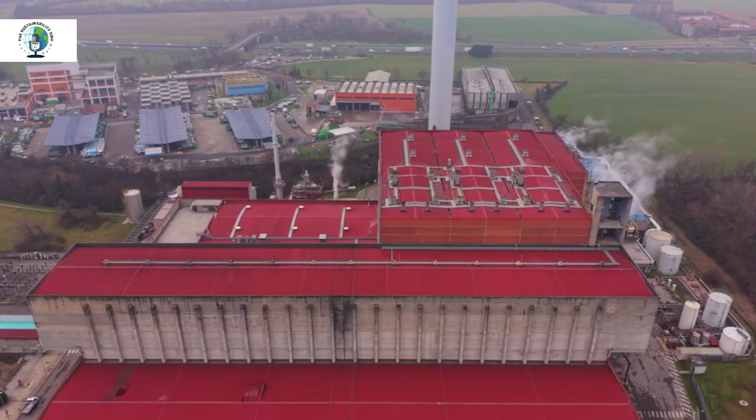Everyday industries generate tons of pollutants, waste that we struggle to manage, hide, or dispose of. But what if that waste isn't waste at all? What if it's the next building block of our cities? From industrial byproducts to construction materials, today we are exploring how pollution can be transformed into possibility.

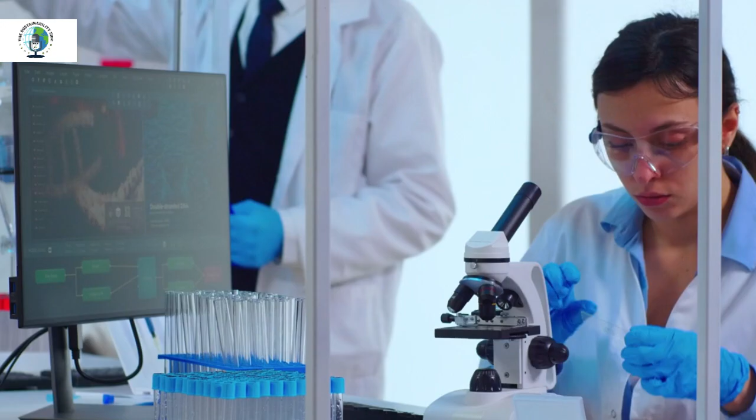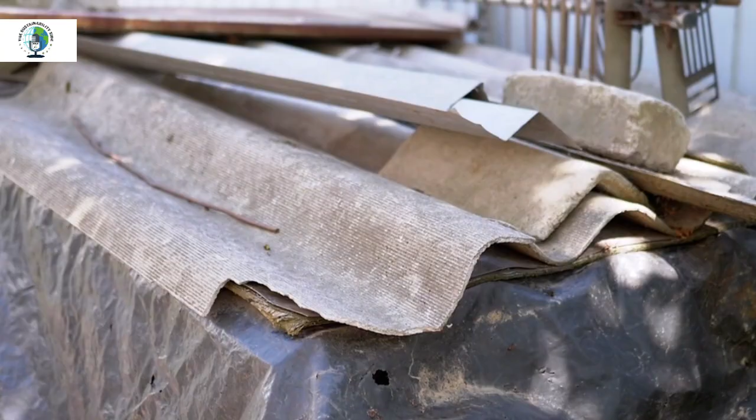Today's episode sits right at the intersection of innovation, engineering, and sustainability. We are diving into a powerful and timely topic, waste to wealth, an approach towards sustainable construction from pollutants. With rapid urbanization and increasing industrial waste, the challenge is no longer just disposal, it is transformation, how we convert environmental burdens into structural solutions. To guide us through this, we have an esteemed academician and expert in the field, Dr. V. Murugesh, professor and head of JCT College of Engineering and Technology. In this episode, we will explore how science, research, and engineering are redefining waste, turning it into sustainable construction materials, and ultimately into a big opportunity.

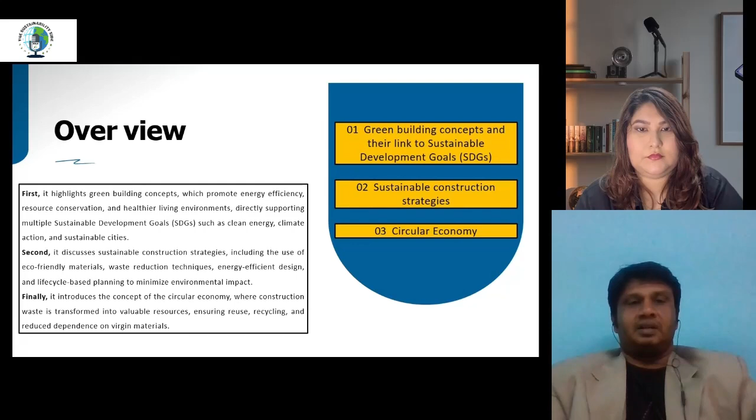The third one, much more important, is the circular economy. So in the first one, we'll discuss the green building concept. Why are we using this green building concept? It is totally for a healthy living environment. Everyone needs a living environment, it should be very healthy. So our first main concept is the green building concept.

Second, we have to use the necessary strategies. Why? We are converting waste to reduction materials, then waste is converted to energy efficient design, which reduces to make a net zero impact on carbon.

So the third one, everyone needs economics, because all our needs work for the economy only. It will very much impact directly on the circular economy because we are recycling, we are reusing our resources into proper usable materials.

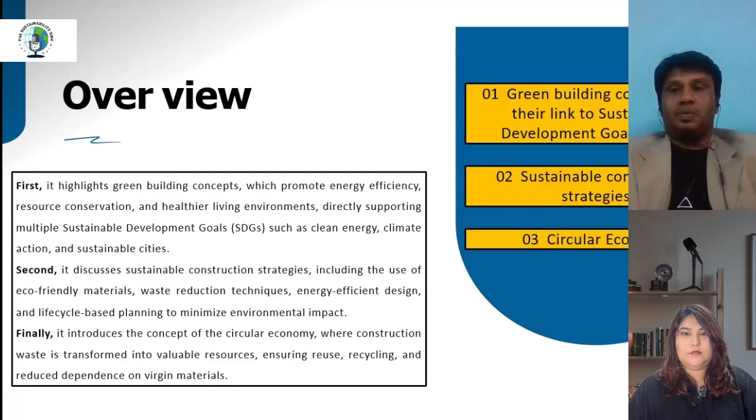So first, why did I select sustainable construction strategy? Because we are all well aware there are 17 SDG goals. Out of these 17 SDG goals, the main 9 are totally focused on our green homes.

That is: good health and well-being; the seventh one, affordable and clean energy; then decent work and economic growth; industry, innovation and infrastructure; sustainable cities and communities; the twelfth one, responsible consumption and production; the thirteenth, climate action; the fifteenth, life on land; and the seventeenth, partnership for the goals.

So these 9 are totally incorporated with our topic, sustainable construction strategy. How is it interconnected? Without sustainable construction, at present we are facing many greenhouse gas effects. When we incorporate sustainable construction, we can avoid global issues like climate change, deforestation, carbon reduction, biodiversity loss, and acid rain.

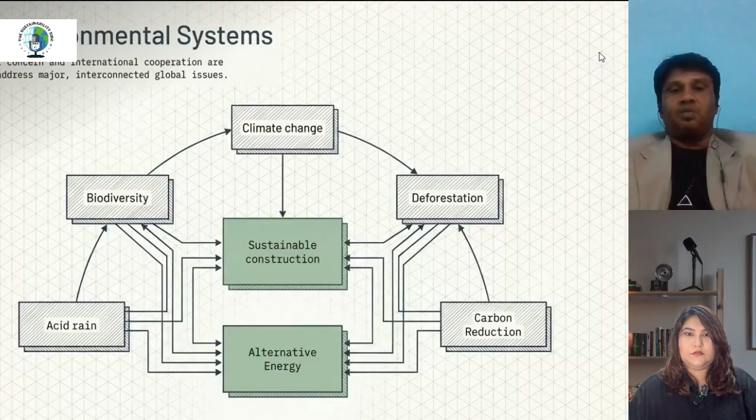At present, the climate is totally changing. The temperature is changing by plus or minus 3 degrees centigrade. Suddenly acid rain falls on Dubai and in many occasions, many places. This is all caused due to our man-made mistakes. So to avoid these problems, we have to go for sustainable construction.

So how does it happen in the construction field? Because we are extracting raw materials for use, for example if we are using steel or cement, we go for lime or we go for iron ore. So we extract the raw materials, then from raw materials we go for manufacturing. While manufacturing, a lot of dust and dirt and also emission of carbon dioxide occurs.

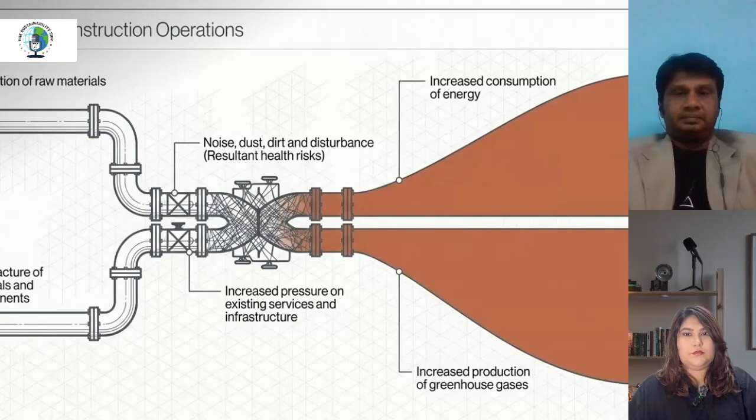Due to CO2, there is an increased production of greenhouse gas in the construction industry. So how to avoid this greenhouse gas or carbon emission from construction? We say this is the valorization equation. What is meant by valorization equation?

It is the key concept used in waste to wealth. The first one is raw pollutant. We collect the raw pollutant and it is directly applied to engineering. What is meant by application? Whether the raw material should be decomposed by mechanical or chemical means, or it should be decomposed by thermal means. So we have to apply our engineering concept to the raw pollutant.

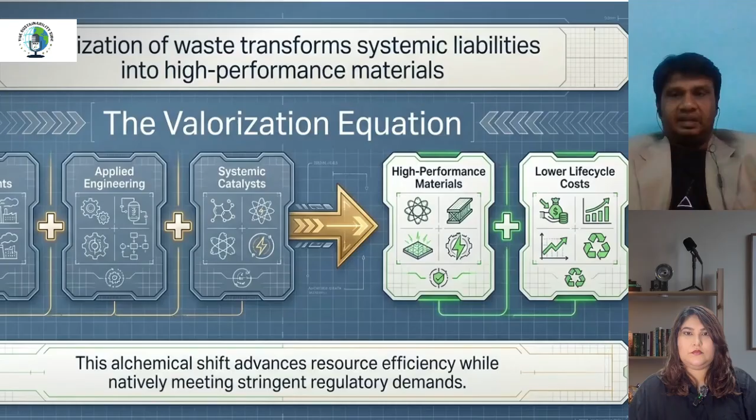Then systemic catalysts we are doing. Finally, automatically the raw materials are produced. Every country depends upon much more economical infrastructures because nowadays the infrastructure plays a vital role in the development of any country.

So this construction company takes 10%. That's why I have selected this topic, sustainable construction.

Then 15% of water is consumed while constructing a building. While constructing a building, what happened? We are utilizing good water instead of salty water. So 15% we are wasting the water.

Then 40 percentage of electricity after construction of buildings we have to utilize. So normally 40 percentage of electricity. So these things combine and automatically 23 to 40% greenhouse gas is emitted out in our environment.

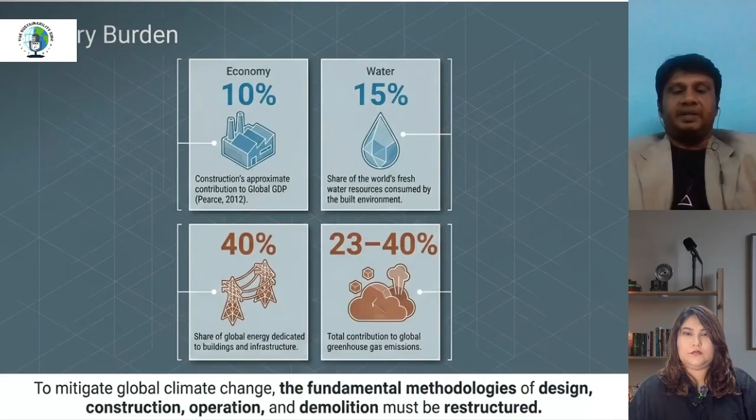So these are the reasons created by us. So for the construction field, first the construction phase is 17%. That is extraction, manufacturing, dust, and site operation.

After that, these should be transported to the site. So during this construction process, 17 percentage of the carbon emission will happen.

After this, 83 percentage will be consumed by our utilization of the building, like heating. Heating means we are using the heaters, AC, then cooling and maintenance of all such electrical things. Due to this continuous process, over 40 to 50 years, normally we are emitting 83 percentage of greenhouse gas effect.

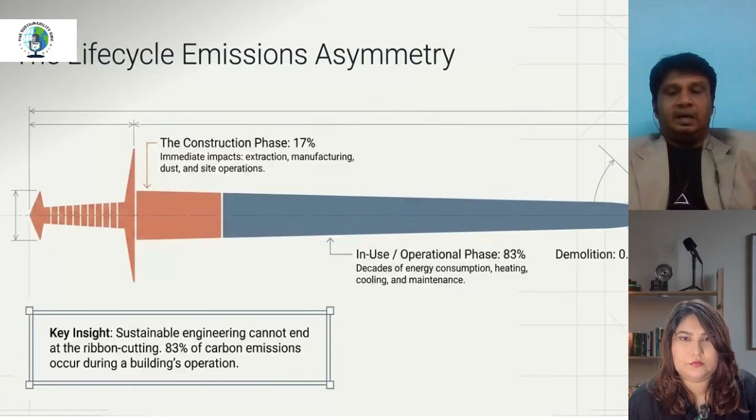So these things should be totally reduced and depleted. So this is the engineering trade.

It is a framework. The first one is mitigation. It is the initial primary impact. It is the root cause of the environmental issues. While reducing this impact, automatically the greenhouse effect should get reduced.

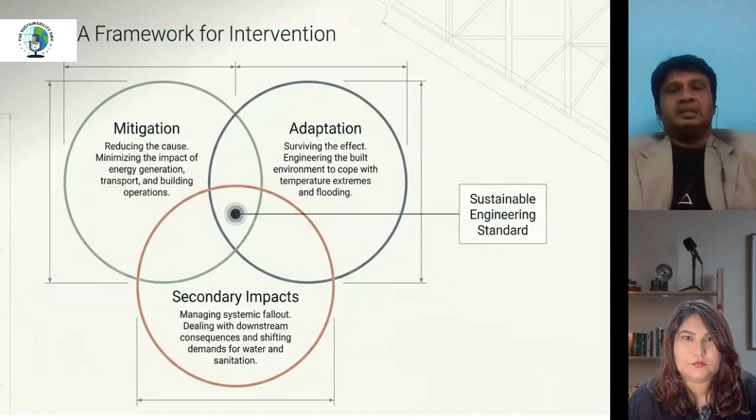So this is the three pillars of sustainable construction industry. The first one is environmental, the second one is economic, then third one is social.

So here we have to improve our air and water quality. We have to reduce the waste streams. I already said 15% of water we are using in the construction field. So we have to conserve the natural resources, and by this we have to reduce the greenhouse gas emissions.

Second pillar is economic. That is, we have to operate equally. We have to optimize our life cycle in the economic performance. So the second one is totally based on the concept of circular economy.

The third one is social. It's totally based on the aesthetic qualities. So by creating these three pillars, we can easily achieve sustainable practice in our construction field.

These are the four phases we are using here. First, we have input. Second, transformation. The third is output. And the fourth phase is catalysts.

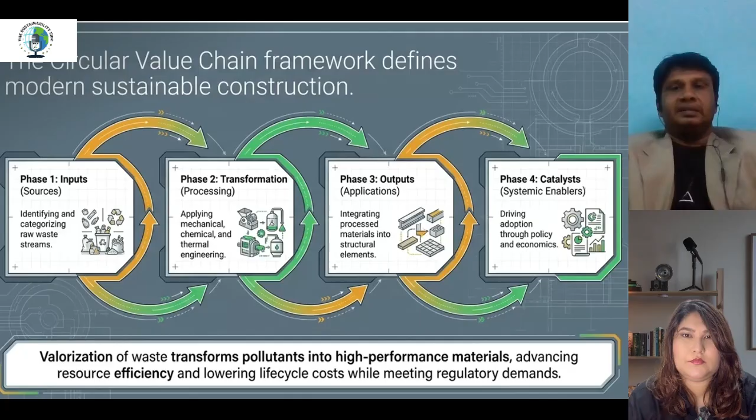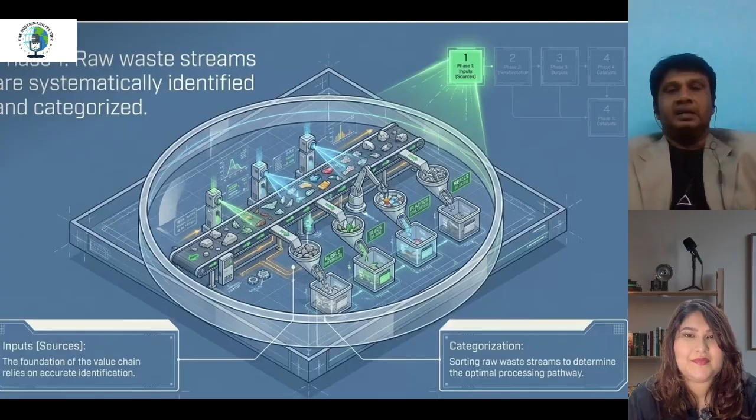So this is the first phase. We are collecting the raw waste streams and categorizing them - whether it is plastic, raw materials, or green garbage waste. We have to segregate the waste products.

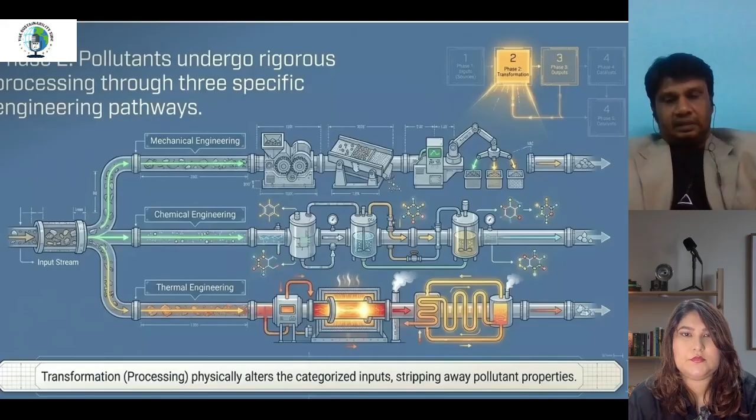Second, based on the waste products, whether we have to treat it mechanically, chemically, or thermally. Based on that, the product should be distributed for the production of materials. So this is the processed material which is integrated directly to the structural elements.

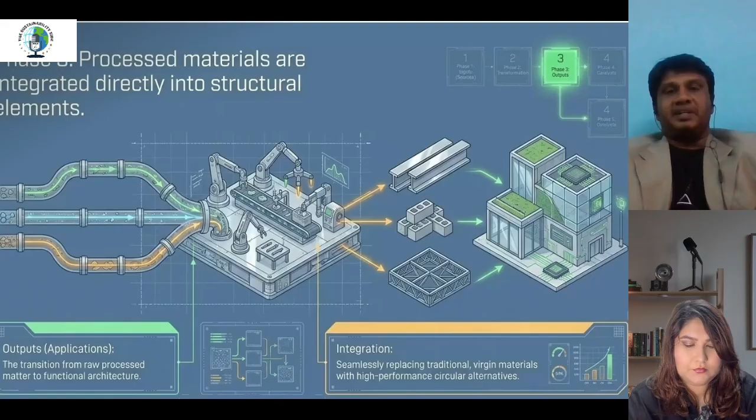So my raw materials now are converting to a finished aspect, or it should become channel sections, modular sections, or any frame structures. My raw materials are directly converted into materials as per the engineering properties.

So this is the valorization matrix. Valorization is nothing but converting waste into wealth products. Here, first the linear waste disposal - we are using fully integrated material reuse. Then high disposal and sourcing costs. For example, we are using plastic water cans or plastic bottles, and automatically it gets converted for the road. That is lowered holistic life cycle cost.

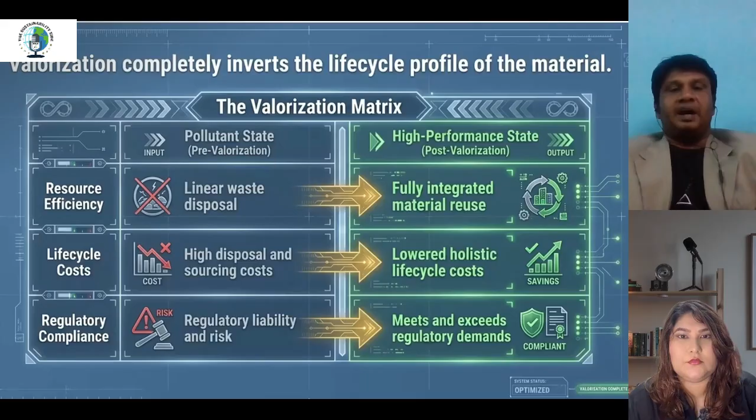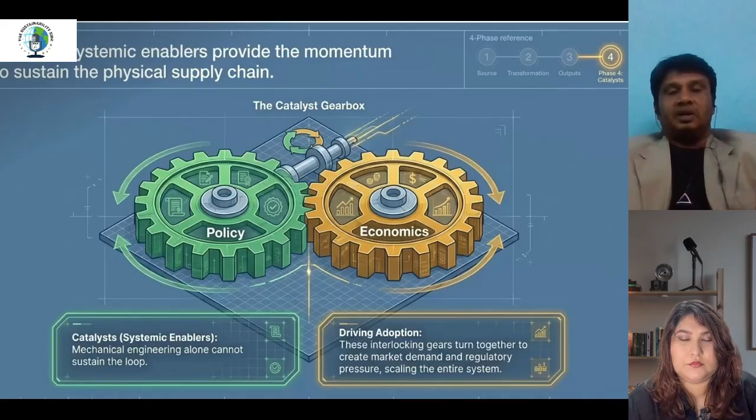First of all, I have to categorize what are the waste streams. Then I have to apply engineering processes - mechanical, chemical, and thermal process. Then I have to go for the circular economy.

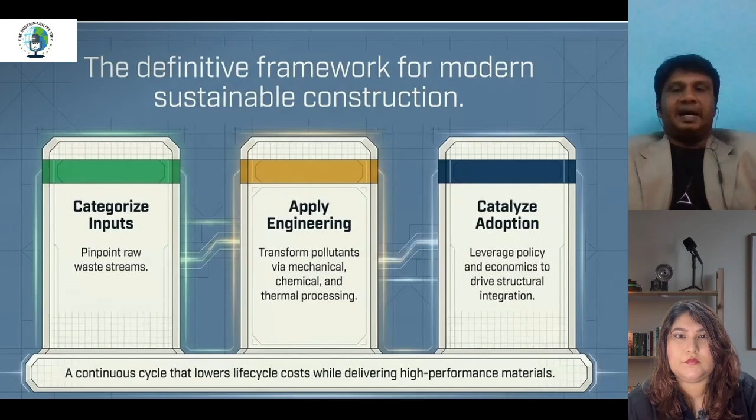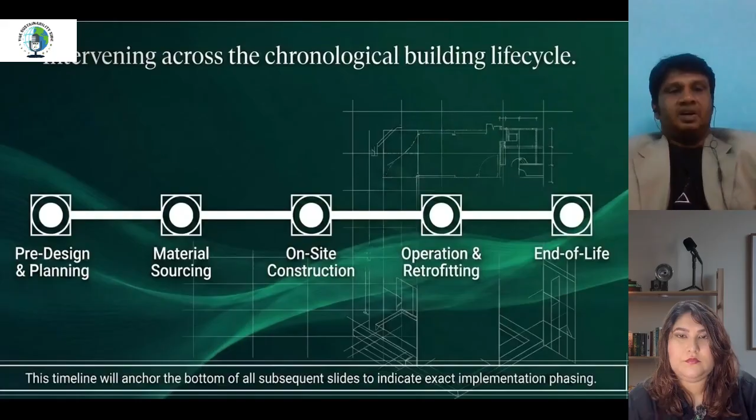So what are the strategies for reducing construction environmental impact, this carbon footprint? First, I have to design well, then materials checking, then it should go for on-siting, then operational retrofitting. See, first one - it is a present building in the environment.

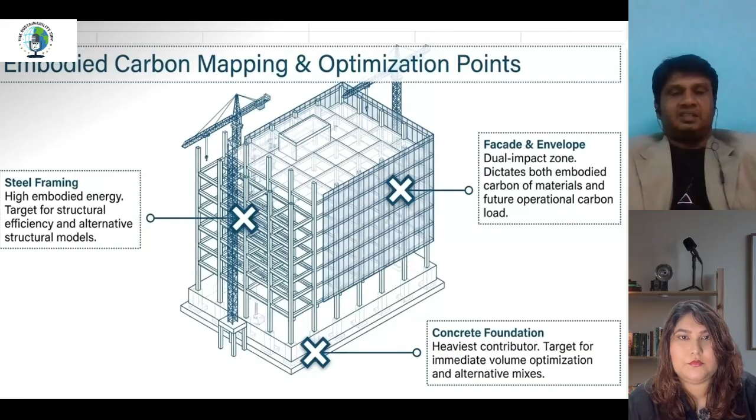So by this traditional building, I have converted a few things. Here I used a foundation instead of Portland cement - I am going for fly ash or slag concrete mixes. Automatically it reduces 45 percentage of carbon dioxide.

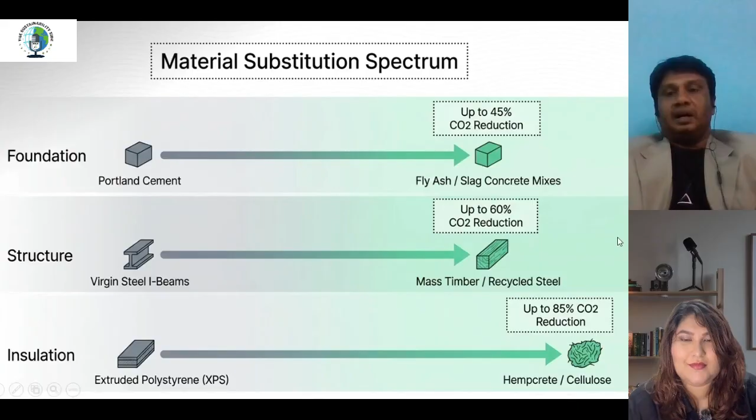Second one, we have seen steel I-beams - we can go for mass timbers, recycled steel, or bamboo. The third one is insulation materials - this is automatically transferred to hempcrete. Now hempcrete concrete is very much famous, and it is adapted little by little in our building construction process.

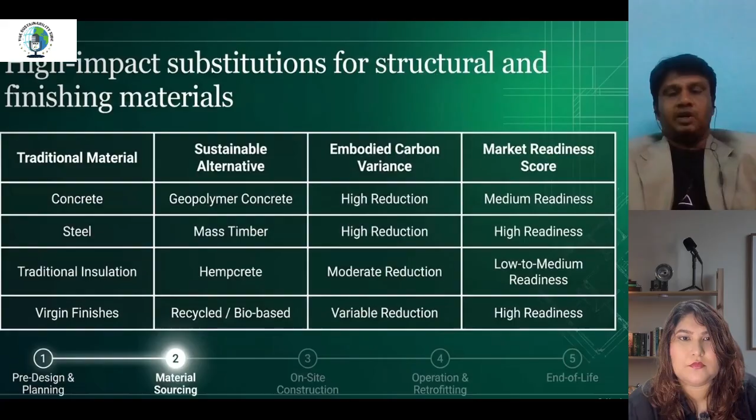So this is a short summary we are making. Instead of traditional concrete, we can go for geopolymer - automatically a high reduction is found in embodied carbon. Then steel - because steel and cement are the major products for carbon emission in construction materials - instead of steel, we can go for mass timber or bamboo. Then for traditional insulation, we can go for hempcrete, and finally we can use recycled or bio-based materials for the substitution of structural and finishing materials.

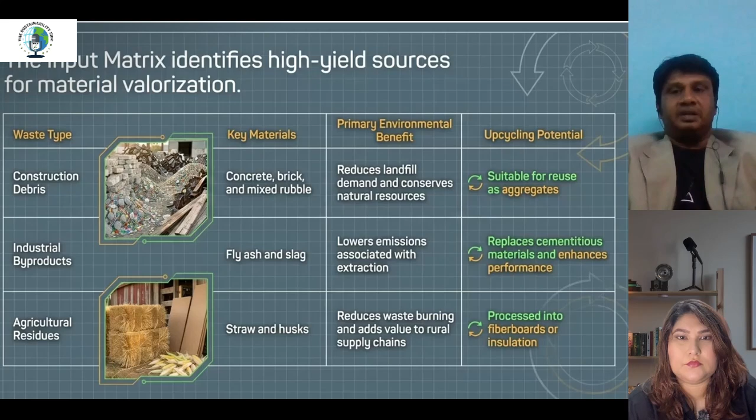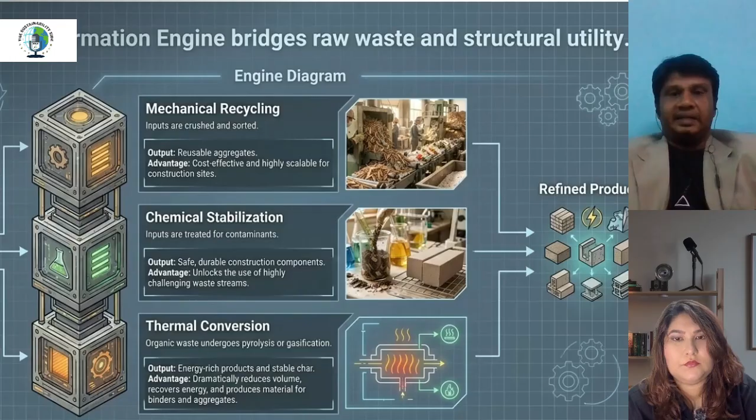As already said, it's pyrolysis or gasification - when we are using agri-based materials, automatically it consists of some biodegradable characteristics. That means in future it will be converted by fungus attacks when used directly. If you go for the pyrolysis method, automatically these biodegradable materials get degraded and it will fulfill all our requirements in the concrete.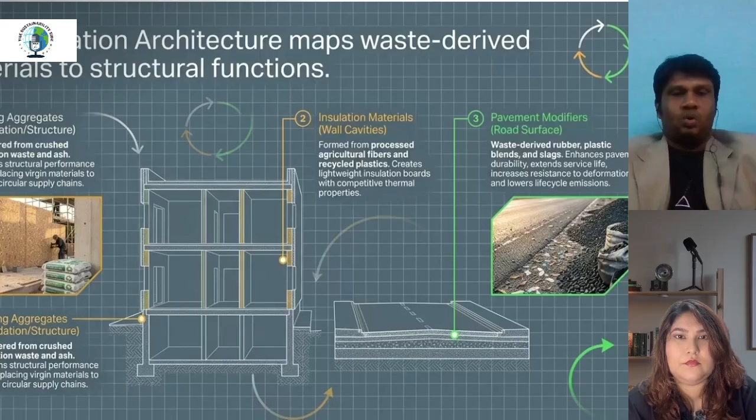Cement, we can go for fly ash. Instead of insulation materials, we can go for agriculture-based ones. Instead of steel, we can go for timber. So this is the traditional one, that is take, make, and dispose.

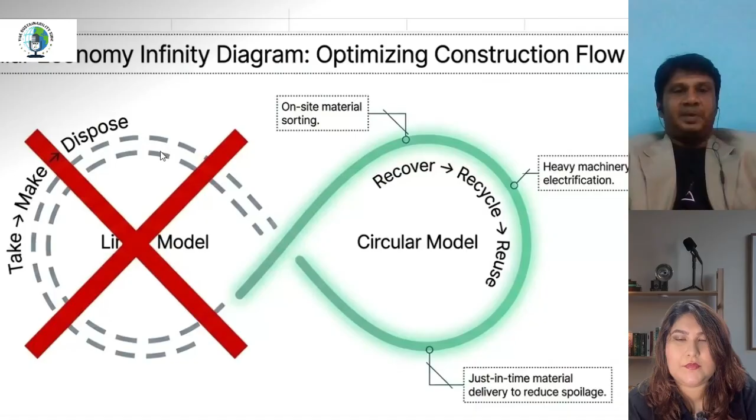This is the first concept we are using at present. But in our sustainable material concept, that is 3R: recover, recycle, and reuse. These 3R will make a great impact on our environment.

So this is the difference I mentioned: while demolishing, automatically the demolished structure goes to the landfill. But here, what we are doing is using modular panels with a bolt rather than weld. If we have to dismantle, we can immediately remove it from the building, so there should not be any landfill materials.

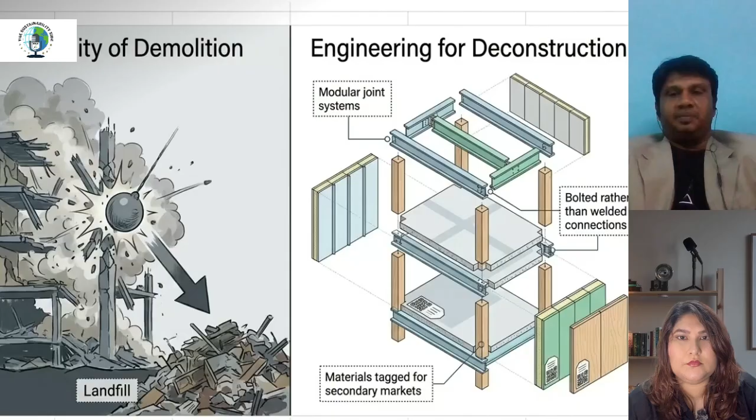Actually, sustainable materials adoption is very complicated because no one will accept it, because when any person is going to build a construction, they will preferably go for cement. When I approach a consultant or any building person, whether as an academician, inventor, or civil engineer, and say instead of cement we can go for 40% fly ash, no one will accept it.

It is a great problem we are facing in the environment. That's why I say we have to use some standard code books. This will assure them that we can go for some sustainable materials.

So it is not an immediate process. We will achieve it, but it will take nearly 40 to 50 years to achieve sustainable construction buildings, because only for the past 10 to 15 years have we been focusing on sustainable materials.

So year by year it automatically increases. First we have to execute the sustainable process, then go for material substitution. Now we are only reaching the material substitution impact. So this should automatically go for circular site operation, that is circular economy. That's why only after achieving all this will we go for the end of life.

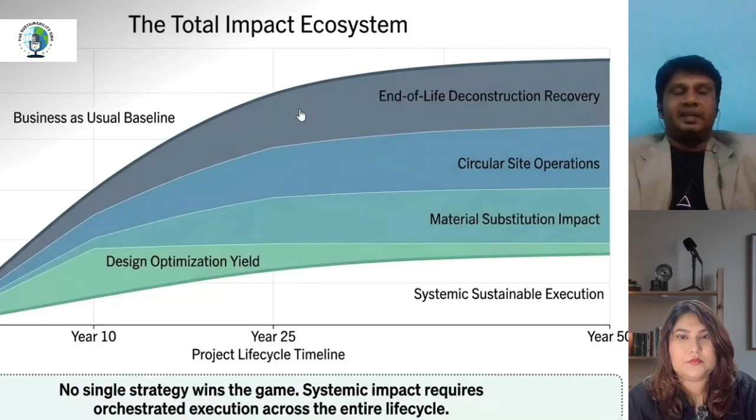That means we will avoid 40 to 50% of global carbon emissions in construction buildings. But it will take a little time, though it is achievable.

So how will it be achievable? The main problem is in our market. First, we need standards and certifications, because without standard and certification, no one will get ready to accept our product. This standard and certification will automatically impact two areas: market incentives and economics.

Because when the product is cement, they purchase it for 600 rupees. Sir, my fly ash concept is totally different - for only 400 rupees per bag they get nearly 200 rupees profit. This gives a life cycle cost analysis. It will give a great economical building, and we can assure that it will achieve very good strength and durability compared to traditional concrete.

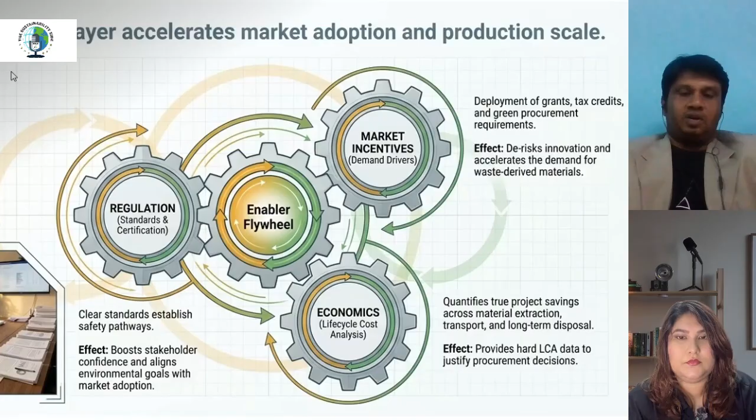So the regulation should be based on market incentives and economics. First we need material sources, then transformation engine, then built applications. These things can be easily achieved by anyone, but the final thing is market demand.

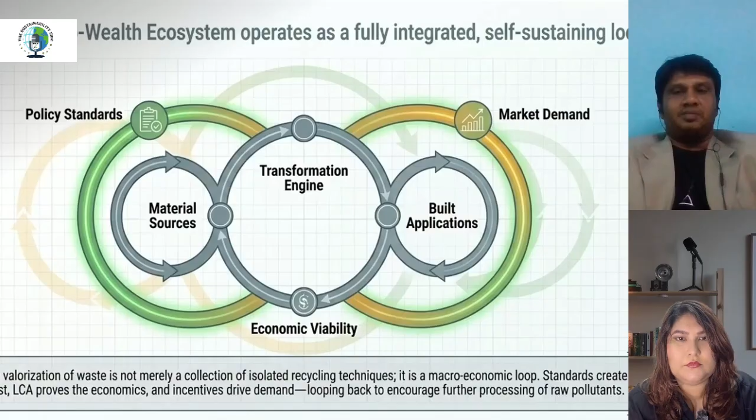It is a great challenge, and we still have to focus on market demand to achieve our sustainable products in the market to become a circular economy. I already said that - transferring environmental liability into structure. These things are much more important.

I am just reaching my end position: environmental reduction is not a design trend, it is a systematic engineered process. So each and everything we have to approach systematically.

We have to analyze the raw materials, whether these raw materials should be replaced with traditional ones, and while replacing, whether it should reduce our greenhouse gas and carbon content.

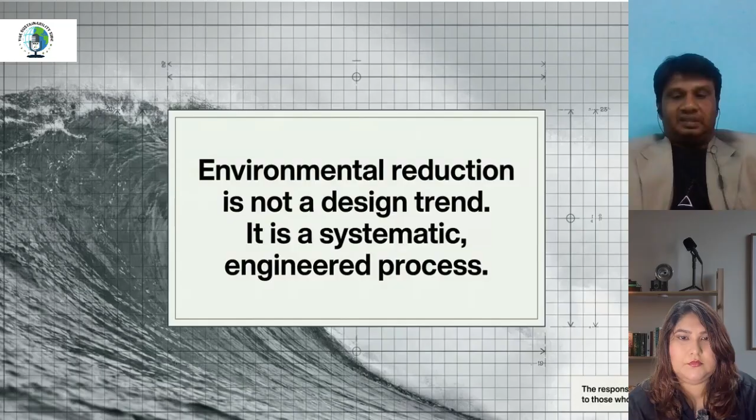All these things should be mainly focused on the strength and durability of any building. The strength and durability should not be affected by the sustainable materials. This is not a design trend; it is a systematic engineering process.

Thank you so much, Dr. Murugesh. It was such a refreshing presentation because I just knew the basics, but the big process behind this carries a lot of structuring, engineering, modeling, regeneration, rethinking. You explained it in a very easy way so that everyone watching and listening can easily understand. Thank you so much for that, a very understandable and simple presentation. It takes a lot to make it simpler, because if I am not from an engineering background, understanding all these technical terms would be very hard for me. You made it very simple and easy for us, so thank you so much for that.

When you approach civil engineers or construction workers and talk to them about eco-concretes or eco materials like fly ash, the first thing they ask is, what is the cost, what is the durability? Even as a researcher and environmentalist, when I talk to these people, they ask, can you give me a guarantee? These are new materials, we don't know, we want to stick with the traditional method. How do these alternative materials compare with traditional construction materials in terms of strength, durability, and cost? What would you say?